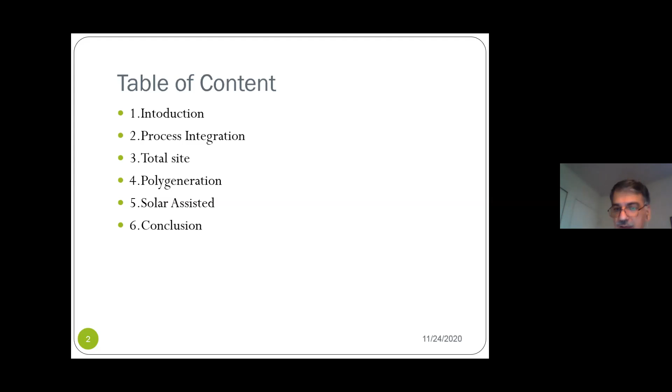Here I give you a brief introduction to my talk today. First, I go to my introduction and briefly explain the process integration. Then I explain some about the total site, polygeneration, and solar assisted system. Finally, I will give you some conclusions about my talk.

The key issue of this work I'm going to present today is how a combination of aspects of process integration at total site and polygeneration can work. The question is, can these tools and analysis collaborate? Yes, the answer to this question is yes, they can work pretty well.

The second question is how fossil fuel and renewable energy can be adapted together. Is it possible to reconcile and trade off between traditional fuels and renewable energies? The answer again is yes. There is well-known literature about this subject, and I will show you these successful approaches which many people are using these days. If we put all these aspects together, we can actually achieve optimal global results in our work.

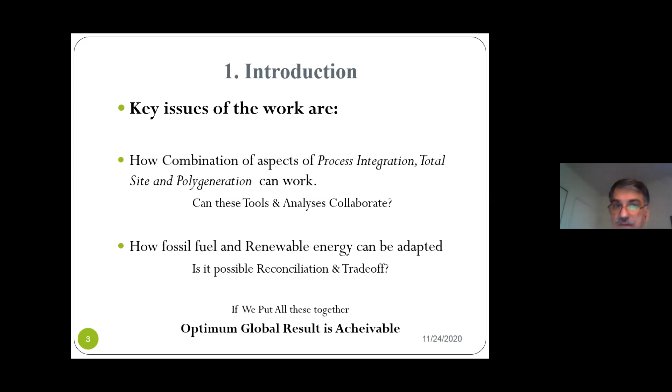Let's explain some about process integration. Process integration has been commonly used as an effective tool for resource conservation and waste reduction. Professor El-Halwagi, who is working at Texas A&M University, defined process integration as a holistic approach to process design, retrofitting, and operation with emphasis on the unity of the process. Heat integration, as a part of process integration, is a systematic methodology that provides a global understanding of heat utilization within the process and applies this understanding to identifying utility targets and optimizing heat recovery as well as the energy utility system.

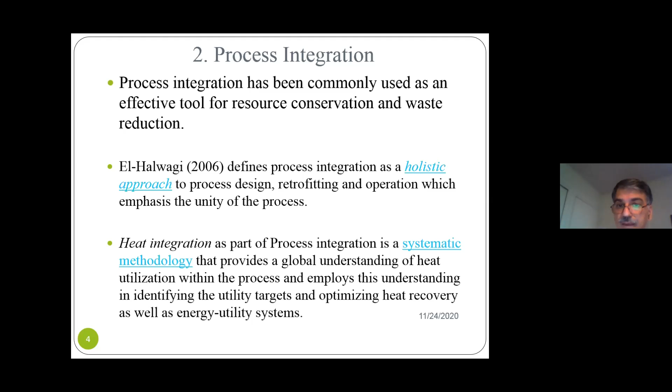Now, after this explanation and definition of process integration, I would like to explain where process integration and cogeneration stand in the overall energy efficiency strategy. If you look at these 4 levels of energy efficiency strategy, you can see process integration and heat recovery actions stand in the 2nd level, and cogeneration and polygeneration, which I will discuss later, stand in the 4th level. From top to bottom, the payback period will increase.

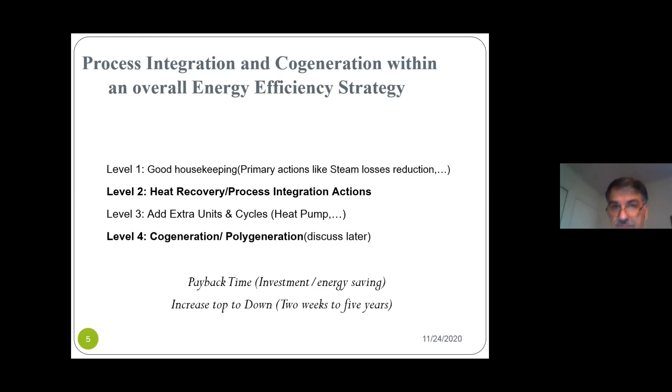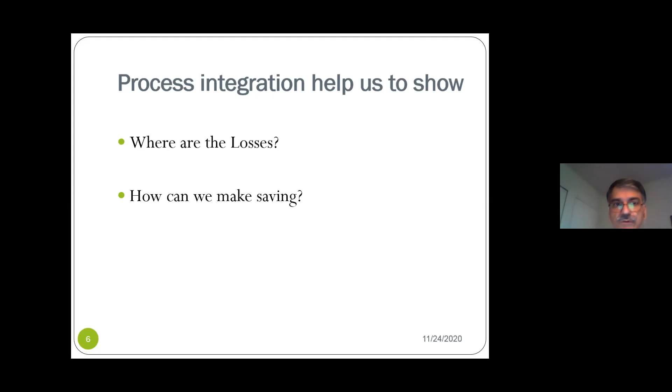So the question is how process integration can help us. In two ways we can take advantage of this procedure, this analysis, these tools. Where are the losses? Process integration will help us show where the losses are in your process or energy system. And the second question is, how can we make savings? This analysis can help show how we can make savings.

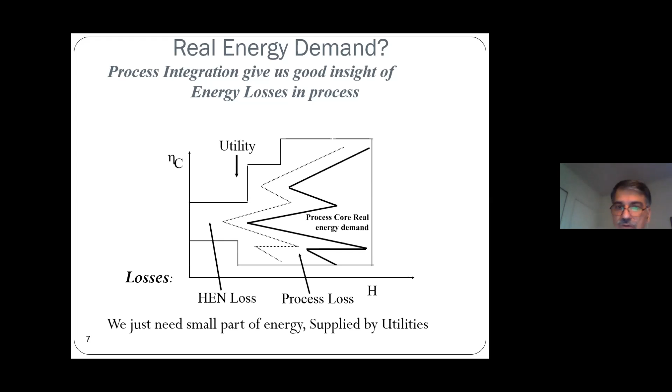So about the second question, is there any way we can actually save energy through a systematic method? Process integration gives you a systematic method. You can save your energy.

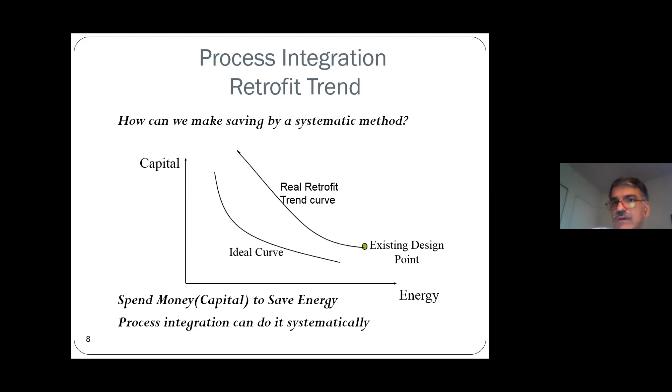So the second issue I have to explain is the total site concept, which we are going to use for solving a problem. Total site energy management focuses on solving the site-wide issue of the process, and is designed to deal with the problem of how best to supply the heat and power needs of an entire plant site. This approach helps engineers optimize cost and reduce emissions via better usage of invested infrastructure.

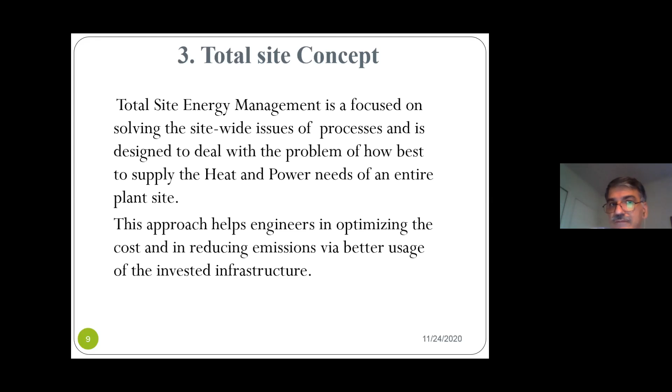So that's the concept, total site. Actually, it is a new look at your system. If you look at this total site, maybe you find it sophisticated, very difficult or complicated, but I take it as an opportunity.

You see, there is a lot of energy levels, energy paths, different types of fuels, utility hardware, process, national grid. I take these various parameters as an opportunity. I can manipulate energy level, I can manipulate using the fuel, different types of fuel, or I can just work with different types of hardware utility in my system. You can see there are different types of process, energy level, different types of turbines. We can connect with the national grid. I see all of these as an opportunity, not as a complication.

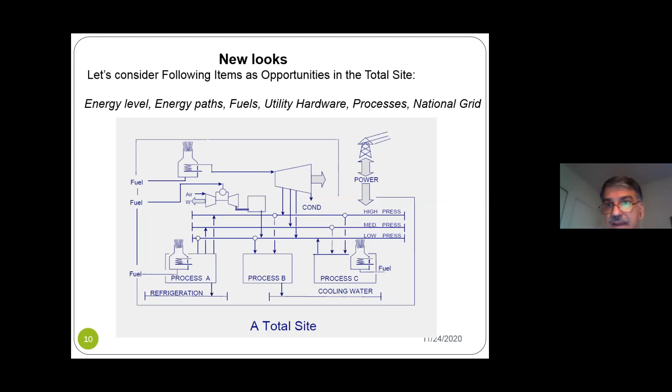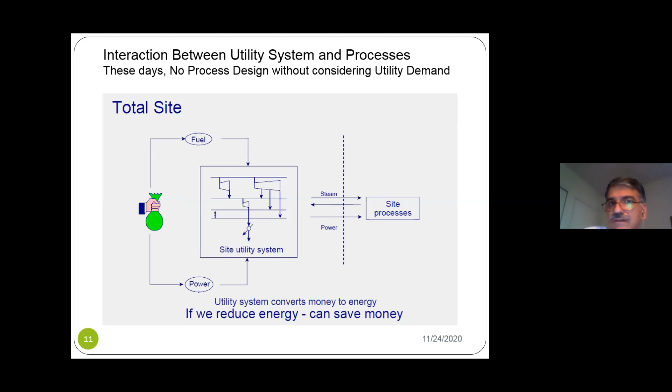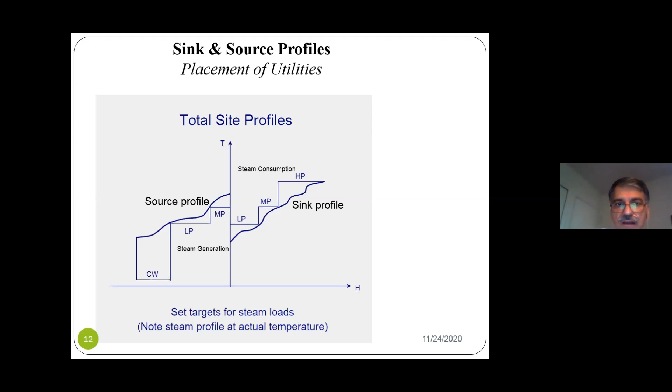If you consume the fuel here, you can produce very high pressure steam, and then you can put it through the steam turbine, and in this shaded area you can generate power, and the back pressure of this turbine can go to the process.

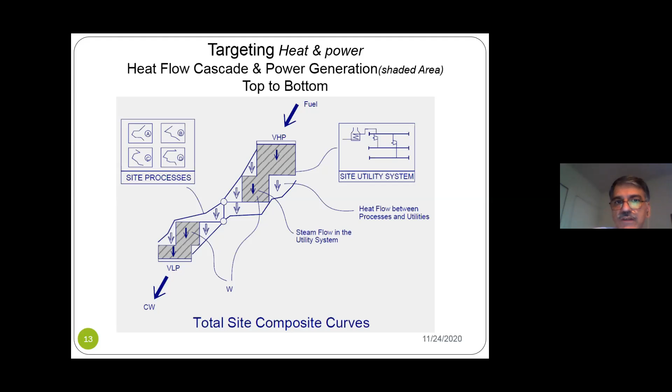So the shaded area shows you the target of the power generation, and there is a heat flow between process and utility, and there is a steam flow in the utility system. So you can see how we related the utility system and processes. In the middle of this interaction, you can generate the power, and you can target heat and power through these tools.

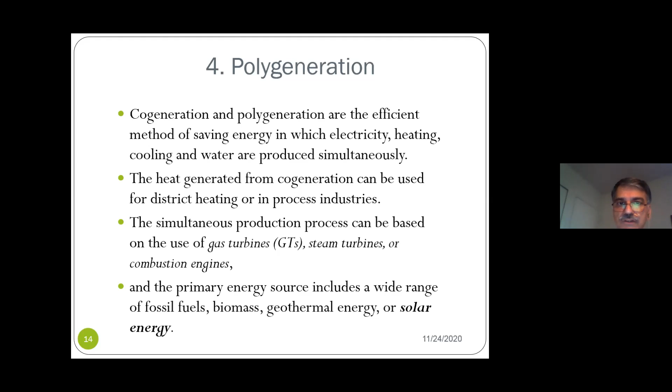What's new? Today we will put some new ideas in the cogeneration system, a new aspect in the cogeneration system. Again, more opportunity we can find here is which energy path in the system you are going to use.

There are a lot of paths you can use in your energy system. Good news is there are thousands of ways you can pass your energy. If you have a network of steam, there are 1,000 ways you can send your steam to your network. So it is good news for me. Let's examine those. Why would you just choose 2-3 ways?

I like to examine all 1,000 ways. I will consider them, and I'm not going to miss the opportunity. The second question: which hardware can be used? Again, good news is there are many types of hardware sequences.

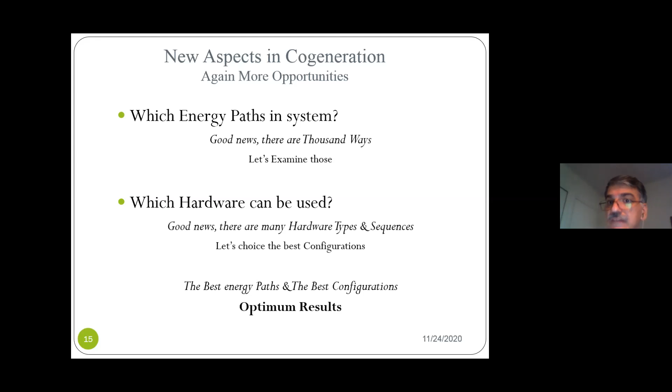Let's choose the best configuration. Actually, the best energy path and the best configuration can result in an optimum result, and the global optimum design can actually be achieved through finding the best energy path and the best hardware sequences.

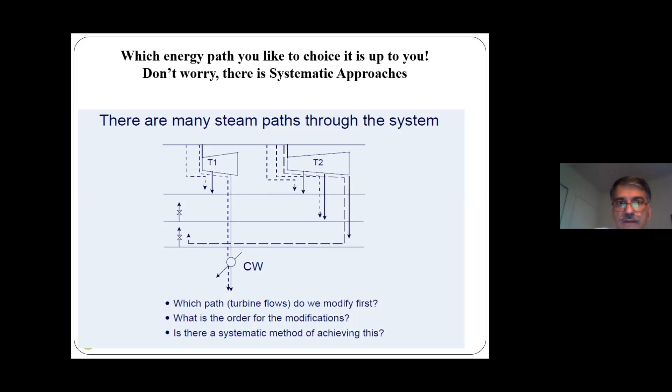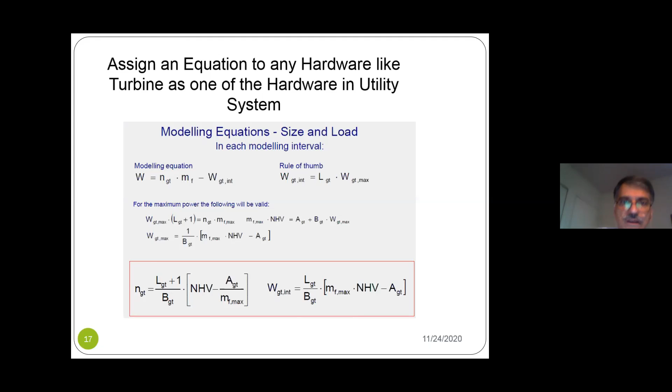You can assign an equation to any hardware, like a turbine, as one of the hardware in the utility system. Here is the correlation for the turbine, and there is a slope and intercept for the turbine, and there is a correlation for each turbine. Each hardware can have a correlation. If you have a turbine network, it means you have a bundle or bunch of equations in your system.

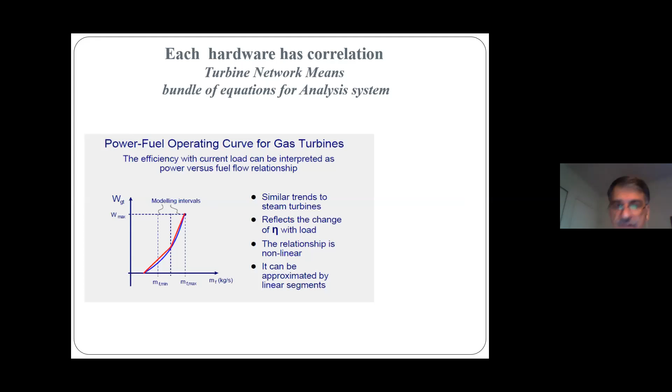Here, I'm going to introduce a new tool, which we name the R-curve method. The R-curve method is generated through the energy efficiency and R ratio.

If you plot a curve, you have one axis as energy cogeneration efficiency and another as R ratio. You can plot the curve, which can show you how things are going in your system. Cogeneration efficiency is shaft work plus Q usage over the Q supply, and R ratio is power production over the Q usage.

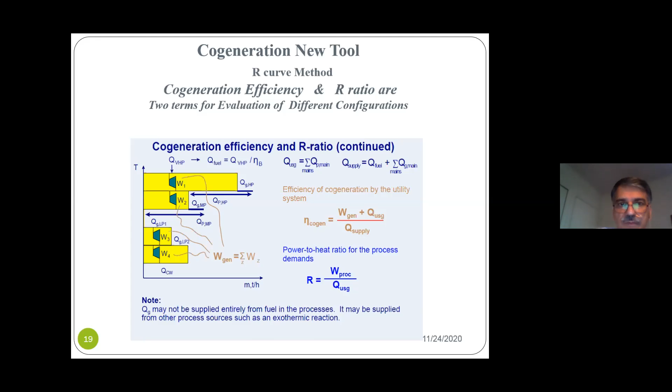Now let's plot cogeneration efficiency against the R ratio. Here you can see this curve, which goes back to the 80s, can actually produce this curve. Later we improved this curve to manage and understand our energy system.

By this curve you can develop different types of configuration, and you can have a good evaluation in terms of cogeneration efficiency and R ratio. R ratio shows you increasing demand. If R ratio increases, it means you are increasing power demand, and cogeneration efficiency is obvious—if you like, you increase your cogeneration efficiency. You can see here each configuration gives you a different trend for your system.

For example, you have a boiler, back pressure turbine, and condensing turbine, which has a lower cogeneration efficiency. The curve below and the curve above—the above curve has a better cogeneration efficiency, because the top curve has a gas turbine plus a fully fired boiler plus back pressure turbine.

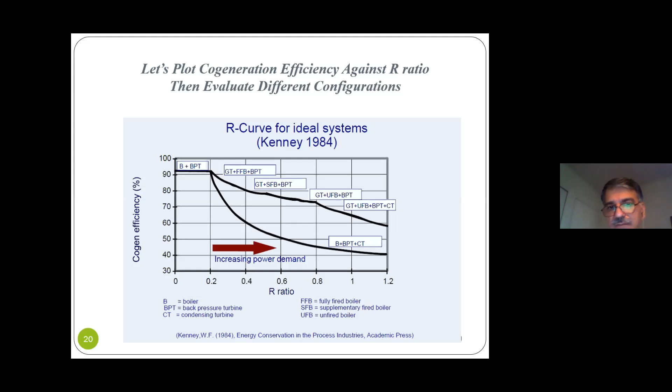So what are we expecting from the R-curve? Extend and improve the R-curve. As I said, we improved this curve, which goes back to the 80s. Find out how to improve the operation of existing systems. Determine the options for power import or export.

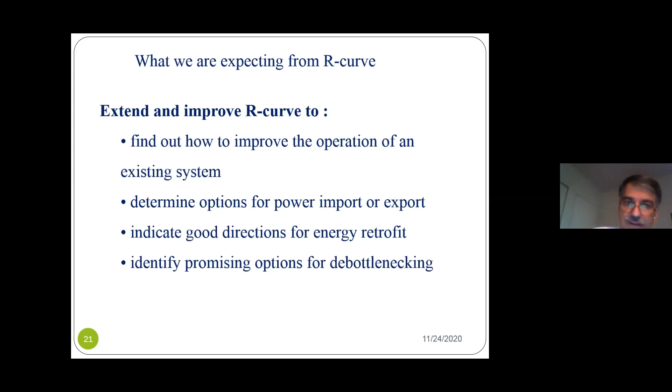Through this methodology or curve, you can find out the best opportunity for import or export of your power, indicate good direction for energy retrofit, and identify promising options for debottlenecking. So here you can see an example.

We have solved this, and you can see there are a lot of options. Many options can be developed for a given example, with a different route for each utility setup. For example, if you look at option S, we installed a turbine of 18 megawatts and a boiler of 60 megawatts. Or if you look at option B, we installed a small condensing turbine of 4.22 megawatts to improve your system.

Each curve in this system shows you a trend you can choose. So cogeneration efficiency against R will show you which one of these curves is the best for your system.

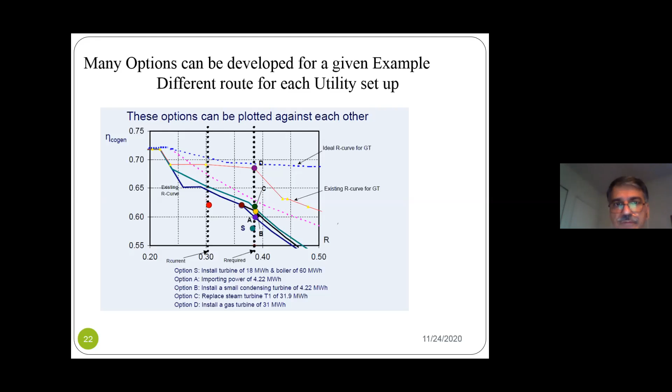Now let's go to solar assisted systems. Like conventional CHP, solar cogeneration is ideal for facilities that use a significant amount of hot water on a daily basis. Traditional CHP systems heat water with the waste heat created from the natural gas turbine during electricity production. Solar cogeneration works in a similar fashion but without using non-renewable sources. Solar cogeneration's advantages over traditional cogeneration are reduced greenhouse gas emissions and stable energy price.

I'm sure all of you believe solar energy will reduce greenhouse gas emissions.

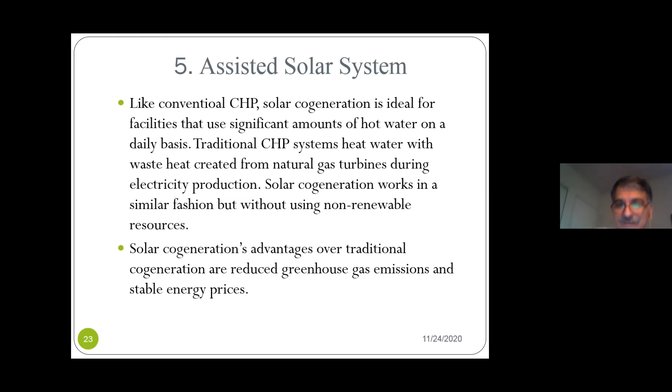We have a national grid over there to interact with, and all of these are opportunities for us to improve our system.

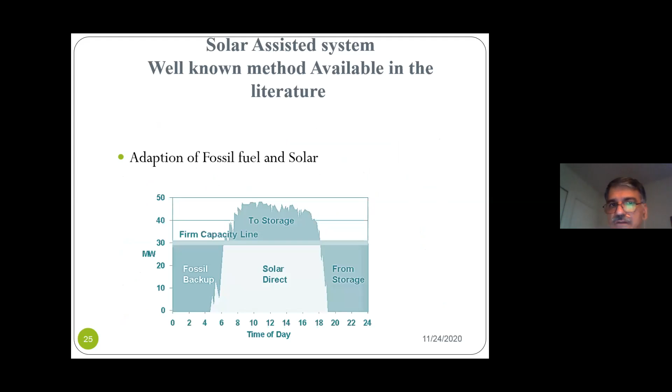Solar assisted system is a well-known method available in the literature. Here we adopt one of them for our work, using fossil fuel and solar energy. Here is the procedure—I'm not going through this procedure in detail, but I'll give you the idea of where and how we can supply solar energy in our system.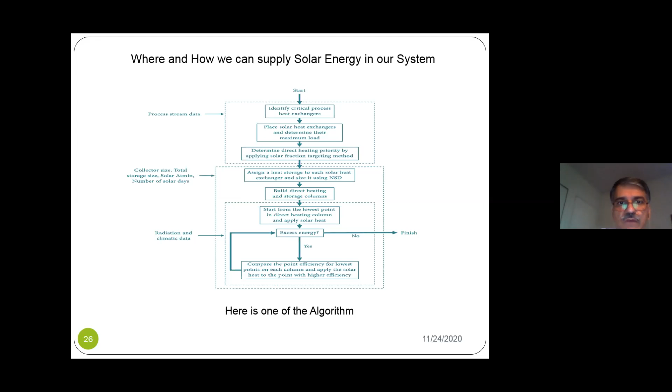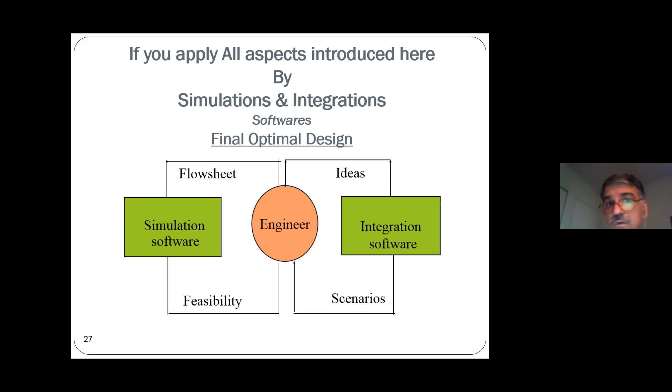So here is one of the algorithms we use. If you apply all the aspects I've briefly introduced here, using simulation and integration software, finally you can get your optimal design. If you are an engineer working with simulation software and integration software, using those concepts, finally you can find the best solution.

So there's great collaboration between cogeneration, processing with solar energy, and total site. Let's finally look at a case study of how it works.

Here you can see the utility system on the left-hand side, and we have 4 processes which this utility system responds to in terms of demand. So we have 4 processes, 12 utility hardware units—we have 2 boilers, one gas turbine, 1 HRSG, 6 steam turbines, and 2 direct drives. And we have 8 steam levels at different pressure levels.

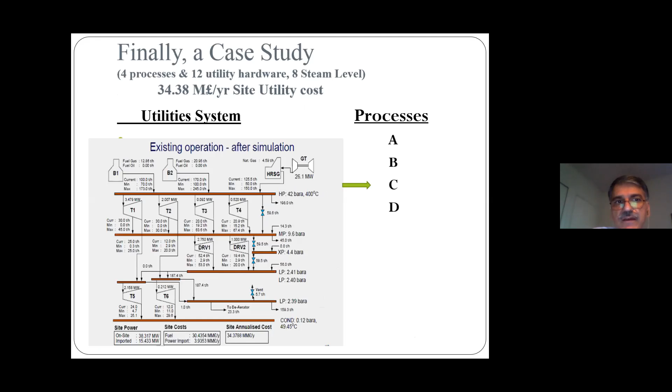If you look at this, the site utility cost here is 34.38 million pounds per year, and we reduce this to 29.48 million pounds per year, which if you convert to Canadian dollars is about $10 million in savings. Using this approach, mostly just software things, we achieve a $10 million Canadian dollar saving in this utility system, taking advantage of those procedures I explained to you.

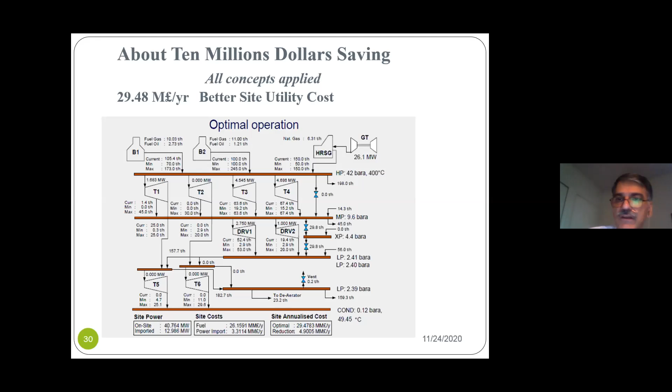So I go to the conclusion. Process integration and total site concepts have improved polygeneration system outputs. The methodology has taken advantage of renewable energy to make new designs more efficient. Each of the above aspects has its own benefits, and we used that, introducing renewable energy to traditional systems to make cleaner technologies.

By introducing solar energy, we adapt solar energy to make the fossil fuel system cleaner, for better understanding of the process. We claim this approach is conceptual, and we have a better understanding compared to pure mathematical methods. There are a lot of people working in this area through mathematical modeling and superstructure.

It's a more reliable and flexible system in terms of control and safety. For example, less demand from the national grid - one of the achievements here is less demand from the national grid, which is why we reduce the cost of utility.

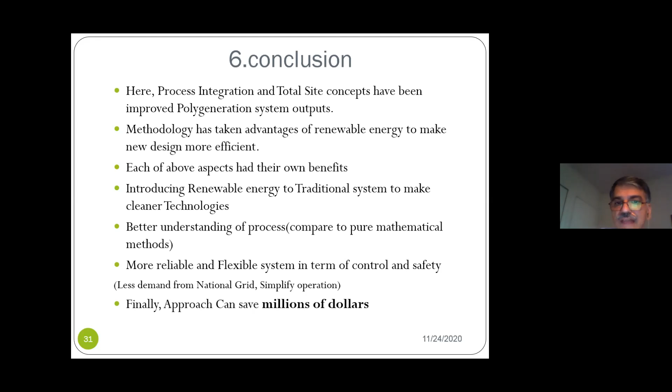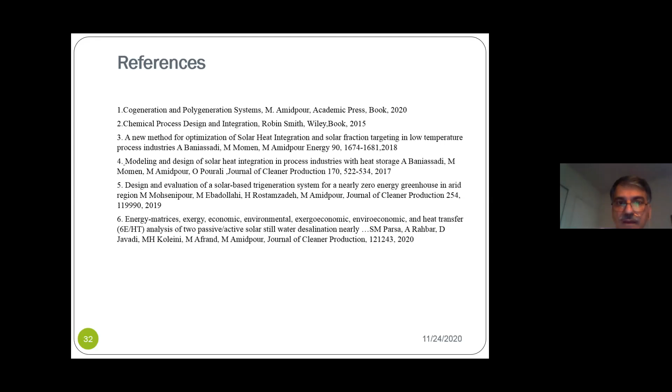So here you can see some references we used. One very important reference here is Chemical Process Design and Integration, written by Professor Robin Smith, published by Wiley. We also publish many papers and otherwise, a lot of papers in this area. So thank you for your attention.

If there is any question and comment, I am ready to answer.

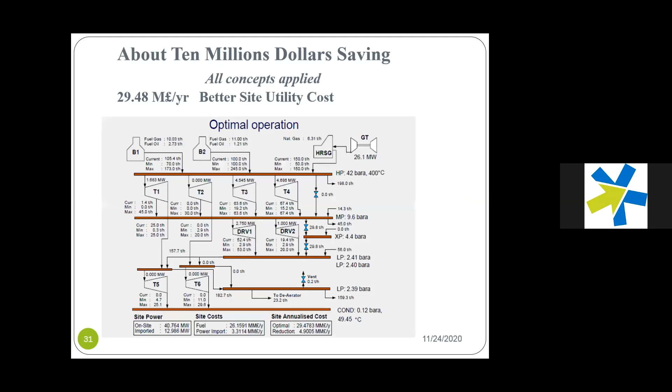You talked about total site and polygeneration concepts. At one point, here at University of Waterloo, Professor Nathwani was considering a refugee camp in Kenya or Uganda, and he wanted to see if there's a possibility to use mathematical modeling or any optimization technique to support the refugee camps with the help of solar PV panels, in combination with biofuel or geothermal electricity at a very small scale. I just wanted to get your feedback if that's a good project, and if total site and polygeneration concepts can help optimize a project like this.

Okay, actually, yes, it is. When we are talking about total site and polygeneration, we are talking about different types of sources of energy, and we are expert about how we can optimize these different types of resources, and how we can reduce CO2 emissions, how we can reduce the cost for such operations.

In my experience, we usually take this polygeneration or total site system beside big factories, big processes. But you are talking about a camp or small places. So why don't we consider making this camp close to some municipal facility or industrial facility? Possibly we can have some sort of cogeneration.